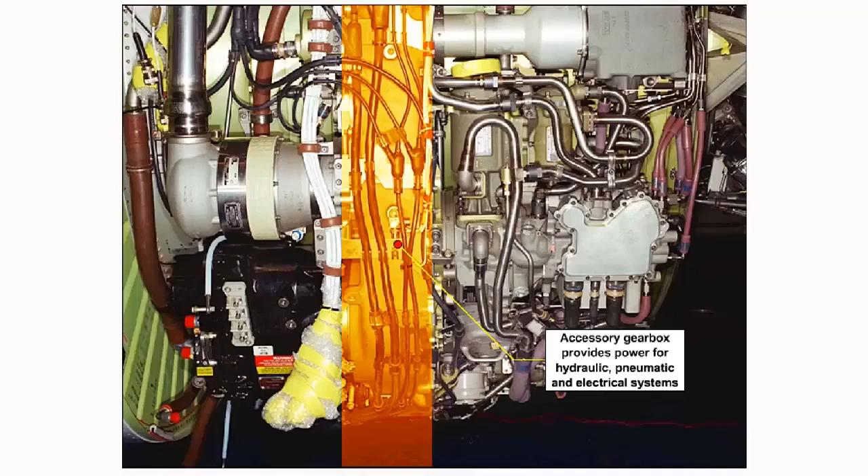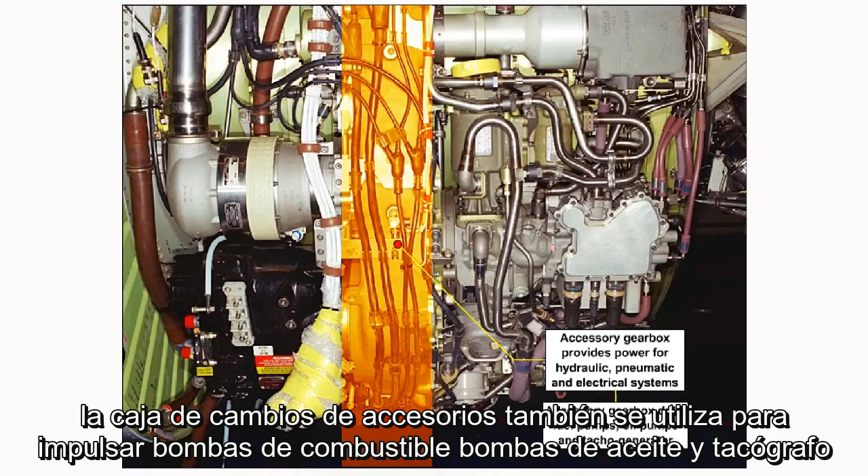The accessory gearbox provides the power for hydraulic, pneumatic, and electrical systems which are used on both the engine and in the aircraft. It is also used to drive fuel pumps, oil pumps, and tacho generators and various other devices necessary for efficient engine operation.

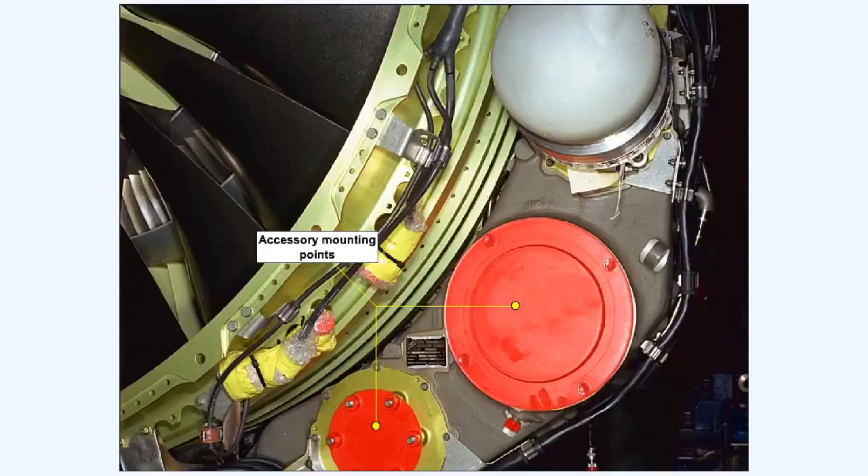The drive for the accessory gearbox is usually taken from the high-pressure compressor shaft via an internal gearbox. The drive then passes to an external gearbox, which provides mountings for the accessories and also, in the majority of cases, the engine starter motor.

This picture shows accessory mountings on an accessory gearbox which have been blanked off temporarily.

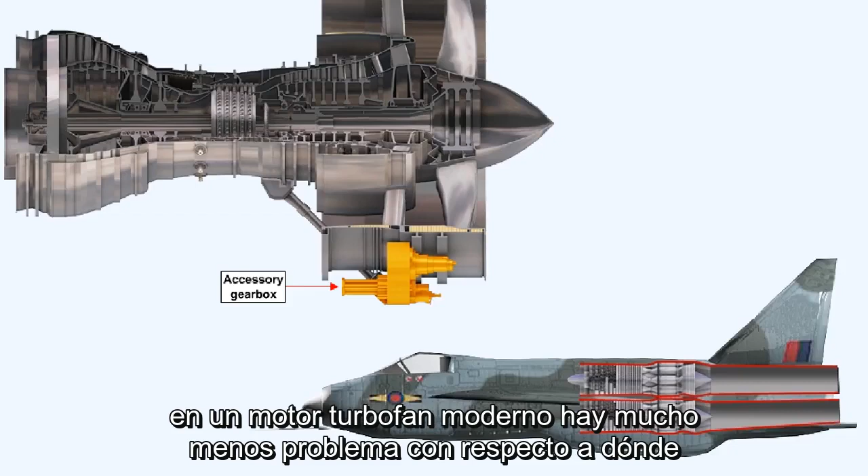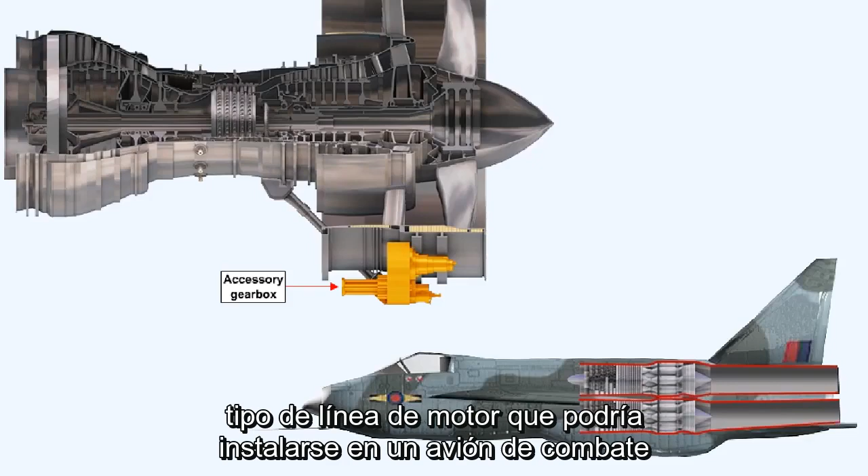In a modern turbofan engine, there is much less of a problem regarding where to fit the accessory gearbox than there would be in the case of the sleek, slimline type of engine which might be fitted in a fighter aircraft. The turbofan engine itself is so massive that even the largest accessories can be fitted beneath the cowling that forms the air intake fairing.

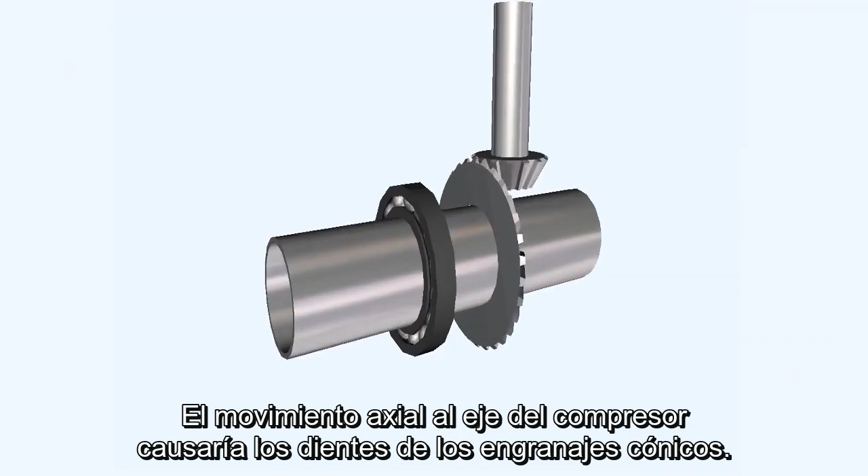Axial movement of the compressor shaft would cause the teeth of the bevel gears to move apart, and the drive would be interrupted. Momentary interruption of a drive transferring 400 to 500 horsepower would impart massive damage to the teeth of the bevel gears and probably destroy them. This state of affairs obviously cannot be allowed to exist.

However, axial movement of the compressor shaft must occur due to expansion and contraction during the working cycle. Some method of arranging the gears so that they do not disconnect themselves because of axial movement of the shaft has to be found before a reliable drive unit can be manufactured.

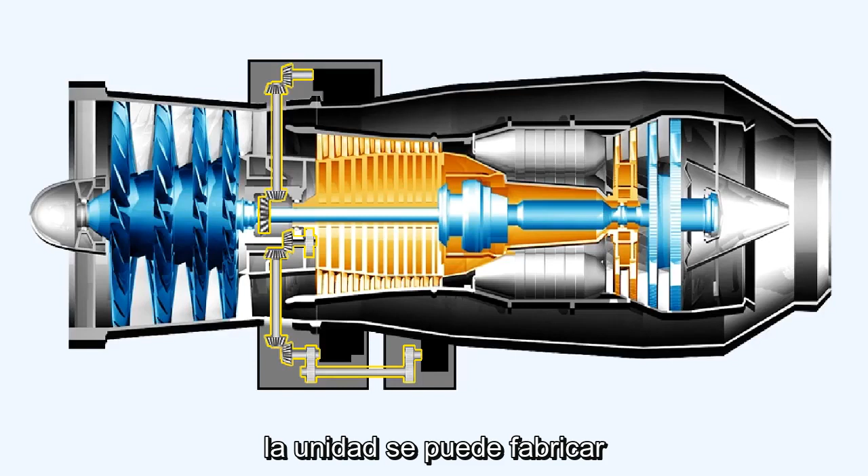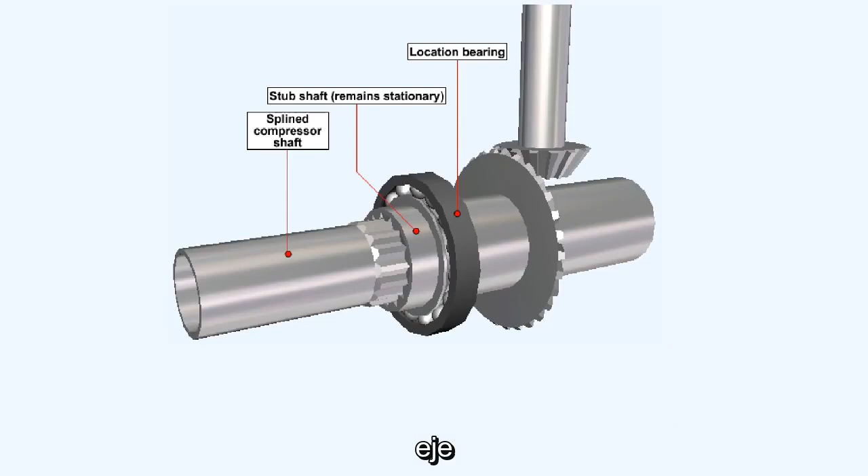This diagram shows one of the methods currently in use to pass the drive between two shafts on modern engines. If the compressor shaft is splined, then a stub shaft, which has teeth cut internally that conform to the pattern of the grooves in the compressor shaft, can be fitted around the compressor shaft. The fact that the spline shaft can move axially while the stub shaft is held firmly in the correct position by the location bearing means that the gear teeth will not lose contact with each other.

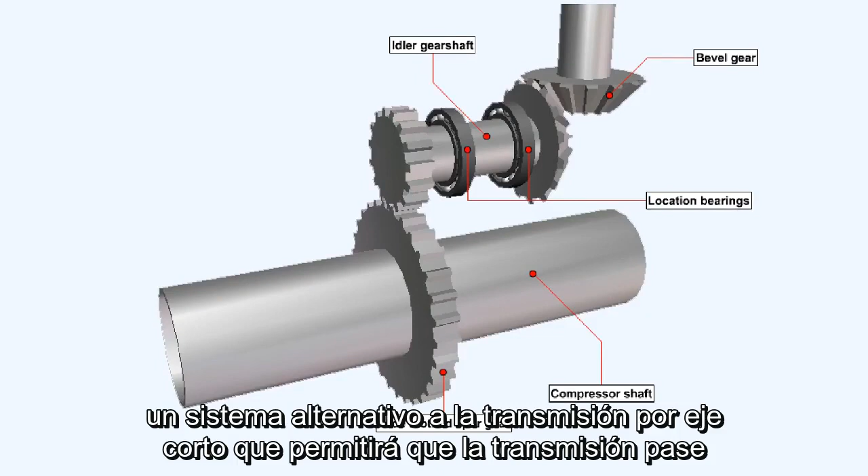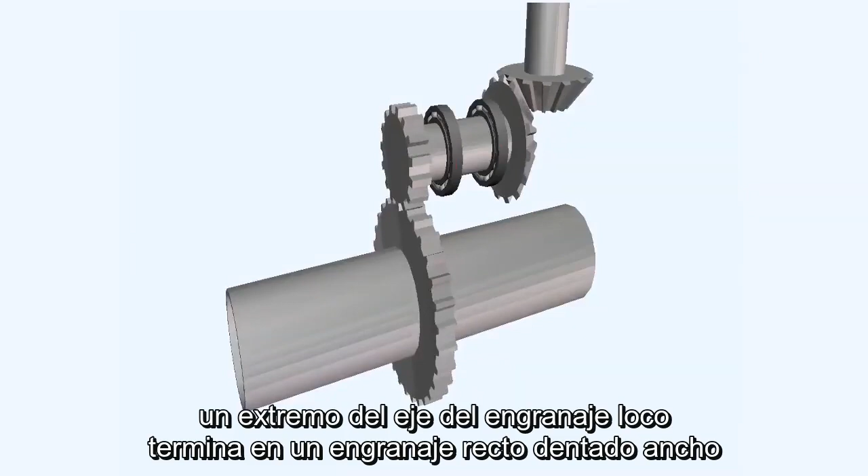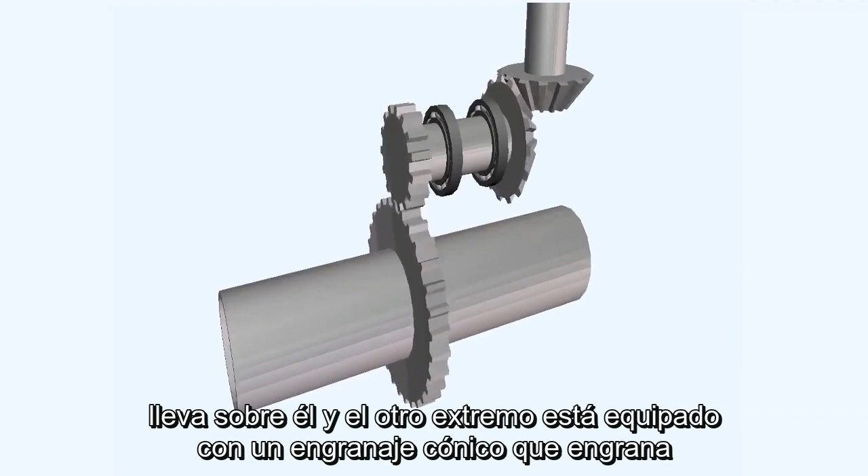An alternative system to the stub shaft drive, which will allow the drive to pass between two shafts, uses an idler gear shaft, which is held firmly in position by location bearings. One end of the idler gear shaft terminates in a wide-toothed spur gear, which can accommodate axial movement of the compressor shaft and the spur gear carried on it, and the other end is fitted with a bevel gear, which meshes with the radial drive shaft.

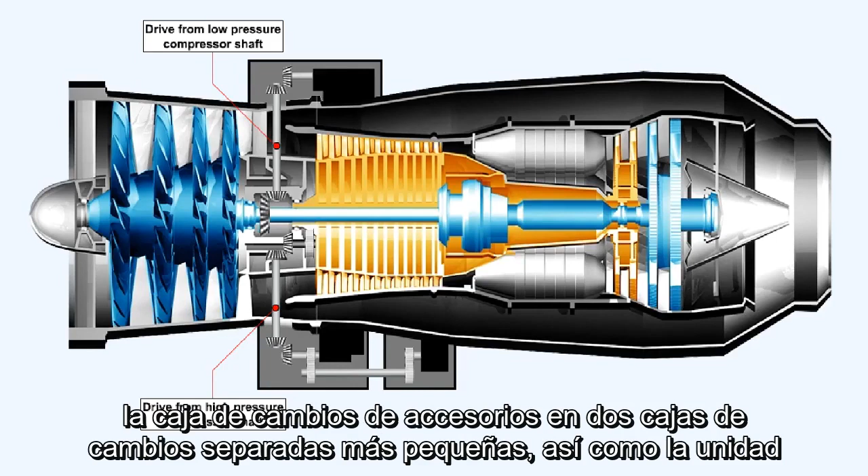In an effort to spread the load of driving accessories, some engines divide the accessory gearbox into two smaller separate gearboxes. As well as the drive from the high-pressure compressor shaft, a second radial shaft is taken from the low-pressure compressor shaft, which is rotating at a slower speed, and used to drive a second external gearbox. This two-gearbox system has a second advantage of allowing the accessories to be divided into two smaller groups, thus overcoming the difficulties of limited space around the engine.

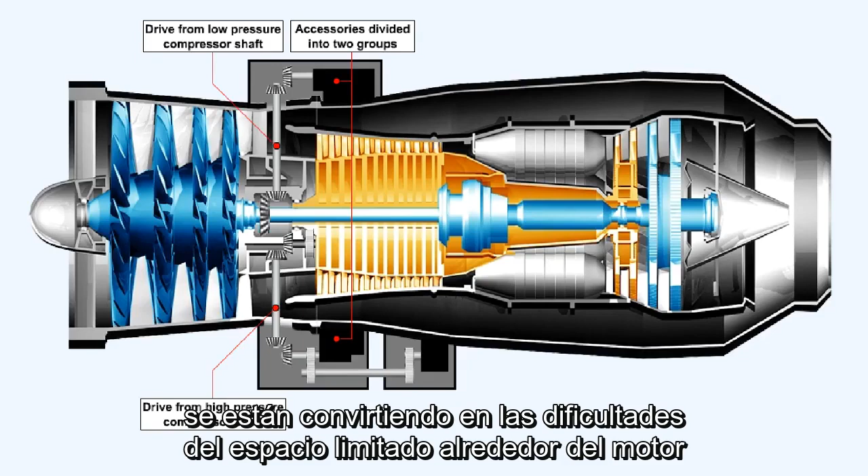During engine start, the starter motor, which is mounted on the accessory gearbox normally driven by the high-pressure compressor shaft, has reversed the normal drive situation. Instead of the gearbox being driven by the engine, the gearbox is now the driving force on the engine. The starter motor thus causes the high-pressure compressor shaft to rotate, and the low-pressure compressor shaft is rotated subsequently by air being drawn through the engine.

This generates a situation that requires that accessories which are specific to the engine's operational needs, such as the oil pumps and the fuel pumps, are grouped on the gearbox which is driven by the high-pressure compressor shaft. This gearbox is classified as being the high-speed external gearbox, because it's being driven by the shaft which is rotating at the highest speed of all. Logically, the other accessory gearbox is called the low-speed external gearbox.

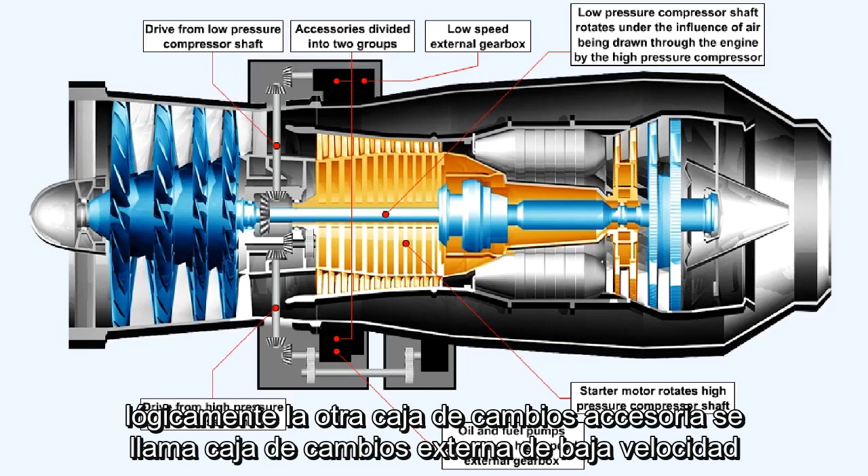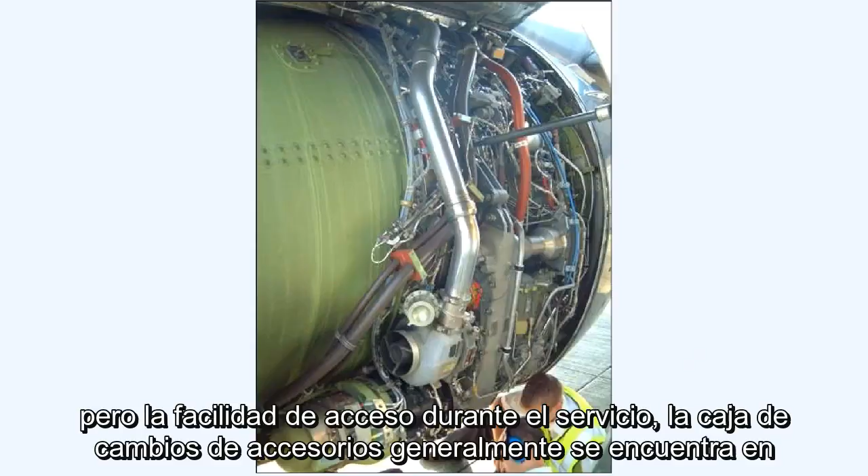Having to fit the gearbox around the engine means that the accessory gearbox must have a banana-like shape. For ease of access during servicing, the accessory gearbox is usually located on the underside of the engine. This picture shows an accessory gearbox and some of the associated accessories.

Worthy of interest are the oil pumps, which are contained in an oil pump pack, a unit which contains one pressure pump and a number of scavenge pumps. In some engines, as many as 6 scavenge pumps may be contained in an oil pump pack.

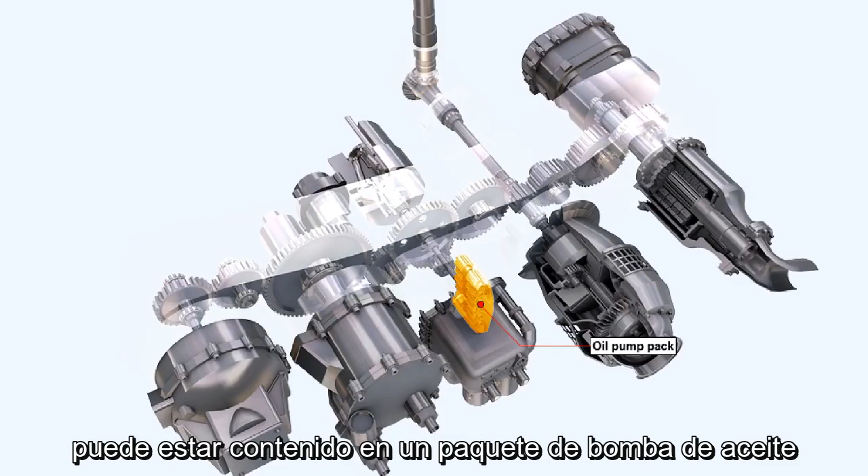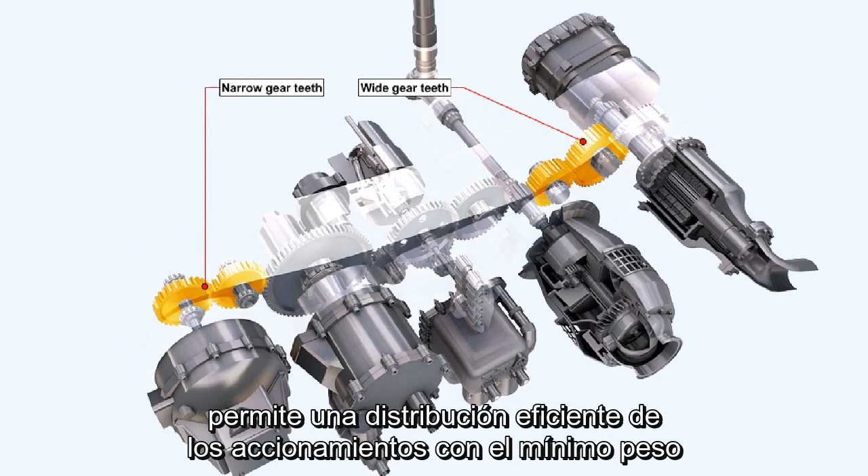The width of the gear teeth in this gearbox indicates that the greatest load from driving the accessories is taken on the right side of the gearbox, while the thinner teeth on the left side gear wheels show that their load is much smaller. This grouping of small and large gears enables an efficient distribution of the drives for the minimum weight.

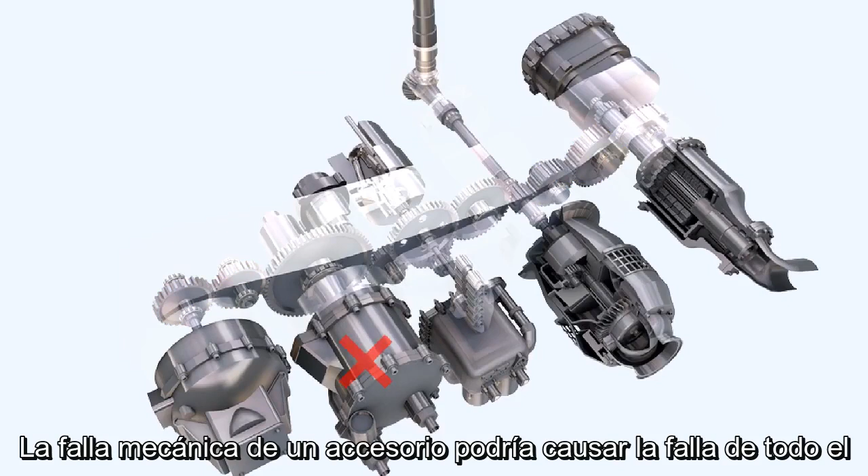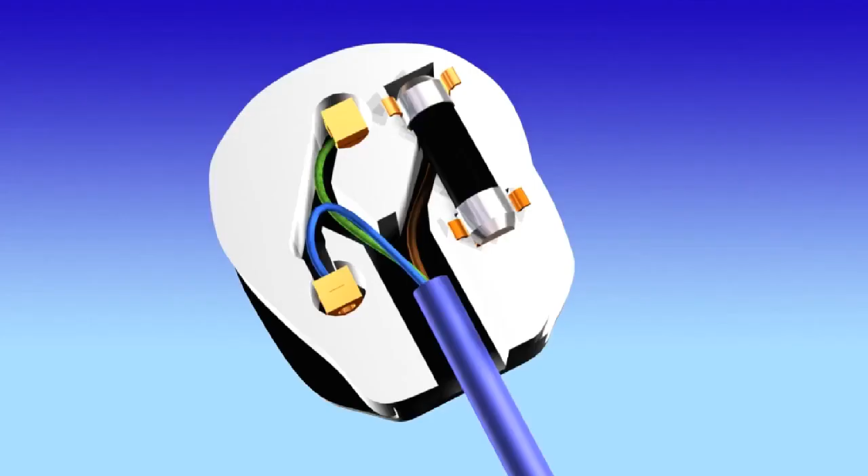Mechanical failure of an accessory could possibly cause the failure of the whole gearbox, and because the engine fuel and oil pumps are driven by that gearbox, the associated engine will fail. To prevent this happening, the mechanical equivalent of an electrical fuse is fitted to some of the accessory gearbox drives.

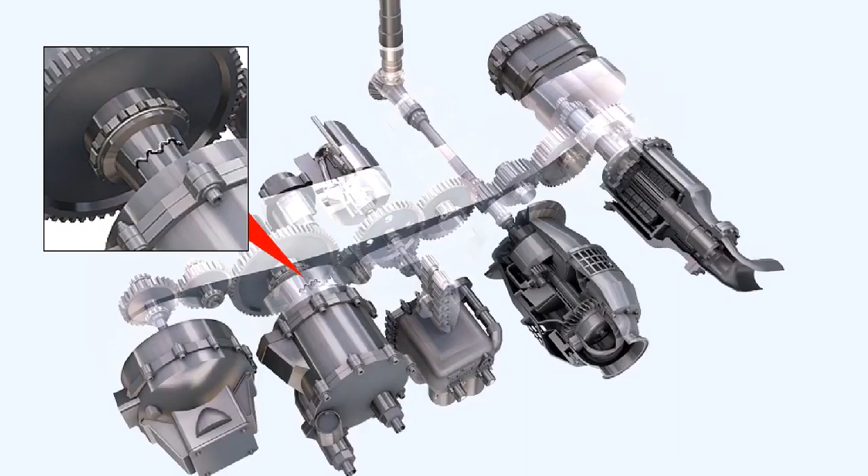A weak section is machined into the driveshaft. This weak section is known as a shear neck. The shear neck is designed to fail if it incurs a load which is perhaps 25% in excess of the normal maximum load for the particular component being driven by that shaft.

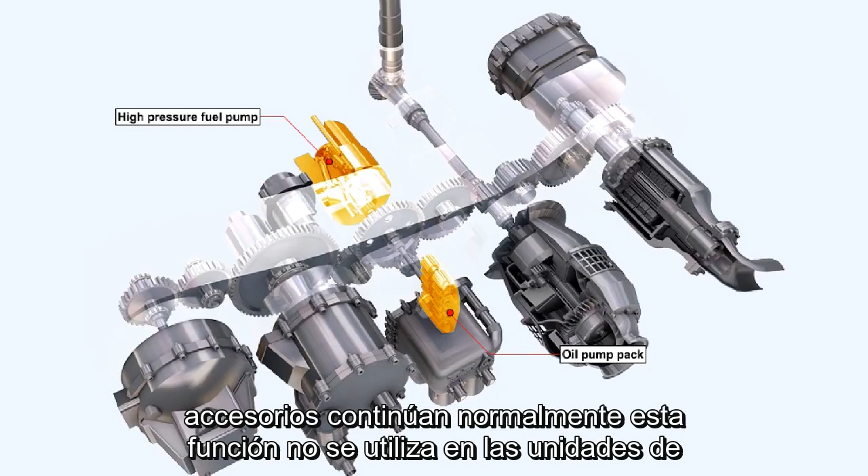In circumstances of excessive overload, the shear neck will break, allowing failure of the individual component, while the rest of the gearbox and accessories continue as normal. This feature is not utilized in the drives of primary engine accessory units, such as the oil pump pack or the engine high-pressure fuel pumps, because any failure of these components would necessitate the immediate shutdown of the engine.

This concludes the lesson on gearboxes.